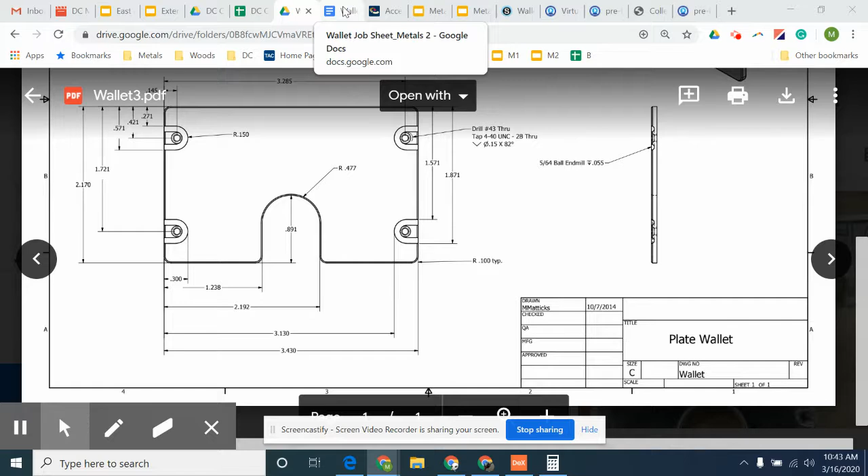So in this video, I want to show you how to create these O-ring grooves. If we go back to our job sheet, it essentially gives us a hint. We only need to draw the outer larger edge of the groove because the tool will create the inner edge when we actually cut it.

We can also just draw one or two of these grooves and then use the mirror tool to copy and make the other ones. So I'm going to show you a couple of different options.

If I come back to my print, what I first want to determine is I'm going to draw this rectangle. If I look, I'm only doing this outer edge right here, not the inner edge for now. So I'm looking at this rectangle, and again I need an anchor point. I'm going to choose this top left corner as my anchor point because I have those coordinates.

My X is going to be 0 since it's on the left edge. My Y, if I look down, is this 271 thousandths right here because that's how far down it is from the Y0.

It's going to be a negative value again. So I'm going to create a rectangle, and I need to know the size, so we have to figure that out. I look down here, and I see one of those dimensions is given to me, this 0.3. So it's going to be 0.3 in X.

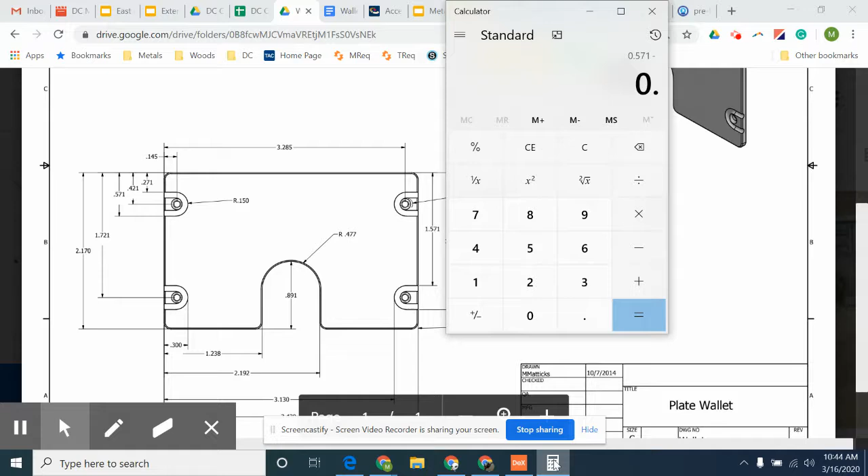As far as Y goes, I'm going to need to do a little math, just like I had to do for the thumb slot. I see it starts at 271 thousandths and ends at 571 thousandths. So if I do a little math and take 0.571 minus 0.271, I end up with 0.3.

So really it's actually a square, 0.3 by 0.3. I'm going to end up making it, at this anchor point, negative 271 and 0.

So I come back to Ericom, and I'm going to create a rectangle. My anchor point is going to be top left. X is going to be 0. Y is going to be negative 0.271. X and Y are both going to be 0.3. And then I'm going to create.

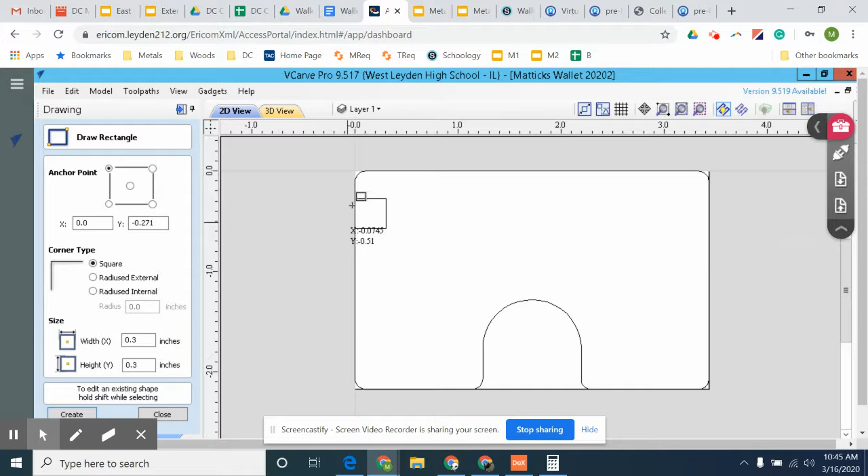It snaps right there. Okay, now I'm going to go ahead and just create the next one by using the print. So now my next one, the only thing that's going to change is my anchor point.

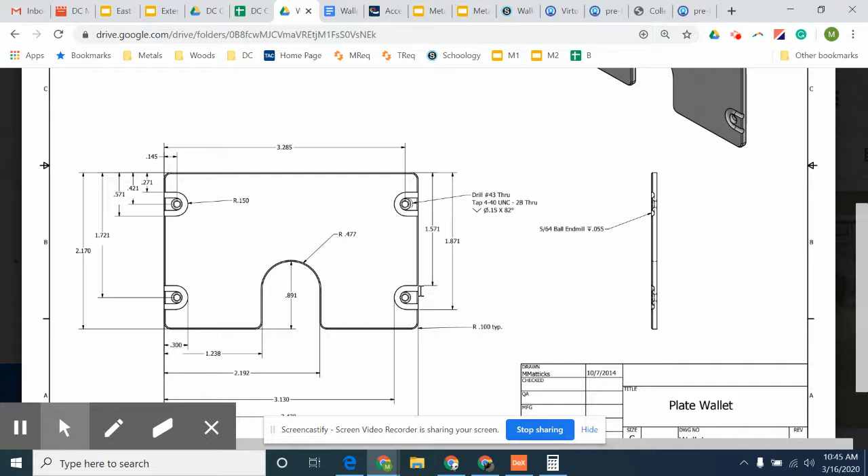I'm going to keep the top left corner, but instead I have to find out what this point is right here. It's not given on this O-ring groove, but if I move over here, I can see that it's negative 1.571. So if I come back, the only thing I'm going to change is this Y value, negative 1.571. Now I have two of them.

Now in the job sheet, it mentions mirroring, so I want to show you that. If I close out of here, I have the two on the left, which is great, but now I can mirror them over to the right.

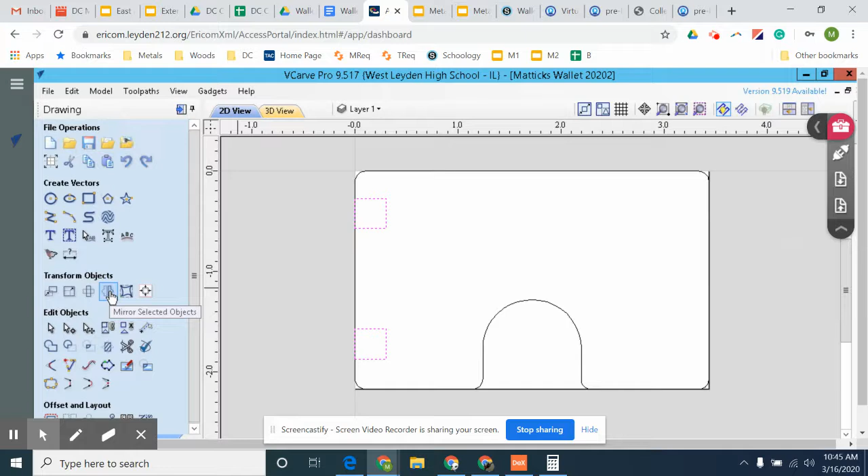If I select them, if I click on one and then hold down the shift button and click on the other one, I can select both at the same time. I come over here to mirror selected objects.

And I have a couple of options. What I essentially want to do is flip it horizontal. I want to flip it around the job center so that it uses the midpoint as its position to flip around, and I want to create a copy.

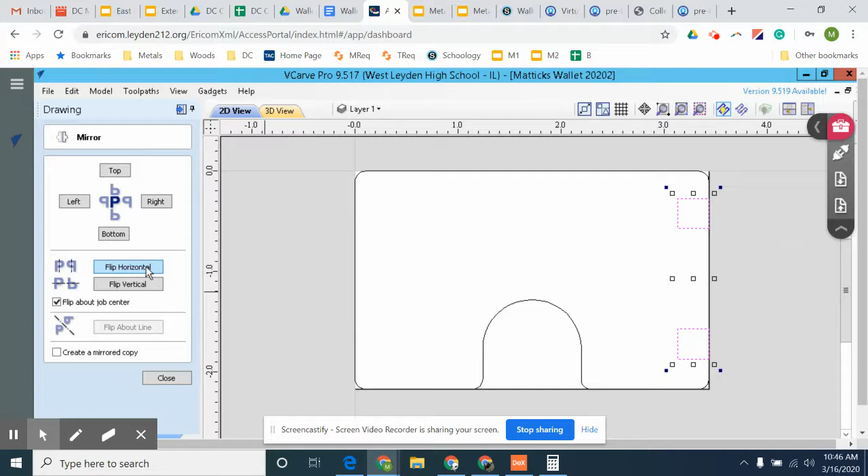If I don't select this, it'll just move the other ones over there. So I'll show you, it just moves them. So I'm going to Control Z to undo, and I'm going to create a mirrored copy and then flip horizontal, and it snaps two over there as well. So it makes the process a little bit faster.

Now I have a 4-sided rectangle here, but what I really want is just 3-sided. So before you go any further, what I like to do is click on the rectangle and just stretch it past by any amount. I don't want to change the location of it, I just want to stretch it past this position. This helps us when we're trimming.

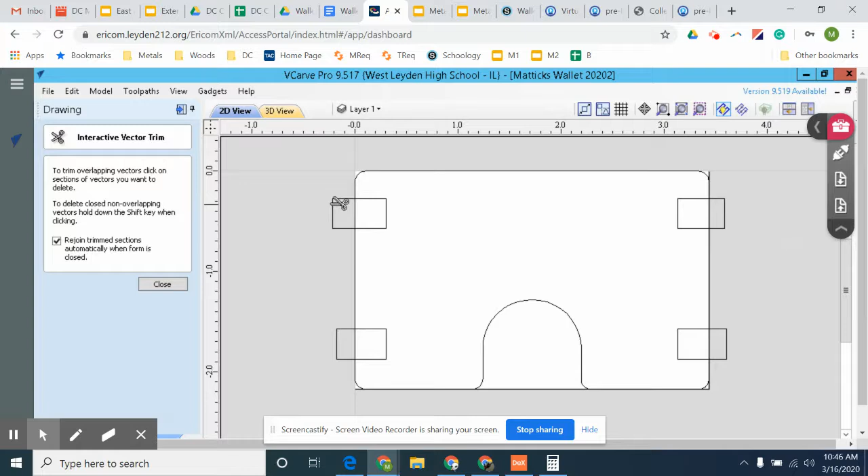So I do that for all 4 of them. Then I come over to my trim function, and what I want is just to trim everything past this line, on the outside of that line. So I just trim there, trim there, trim there, and trim there.

I'm going to escape out and show you what it should look like. If you click on this rectangle, it should just be a 3-sided rectangle, and then it should be independent of the other outline profile, not like we did for the thumb slot where we wanted to join them together. We don't want that for the O-ring grooves.

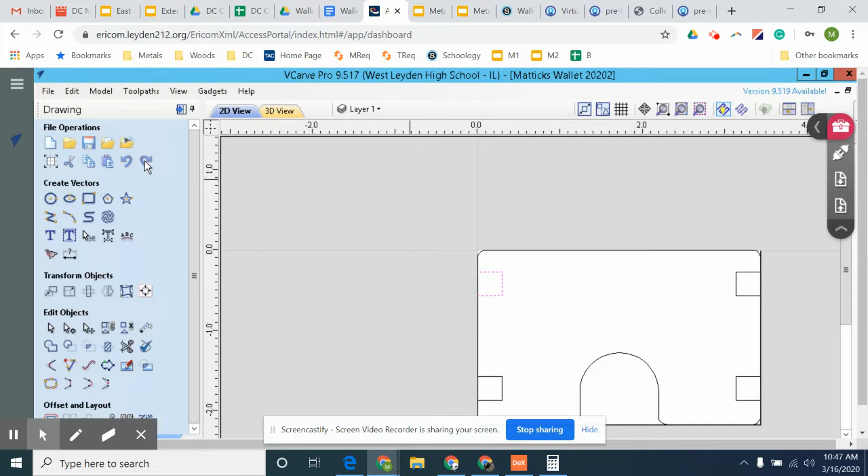So now my last step for the actual groove, as far as drawing it goes, is to just go ahead and do the fillet. I'm going to come back to my print. My fillet for these is 0.150. So if I do a fillet, I set my radius to 0.150. I'm going to go around and fillet essentially 8 locations, 2 for each O-ring groove.

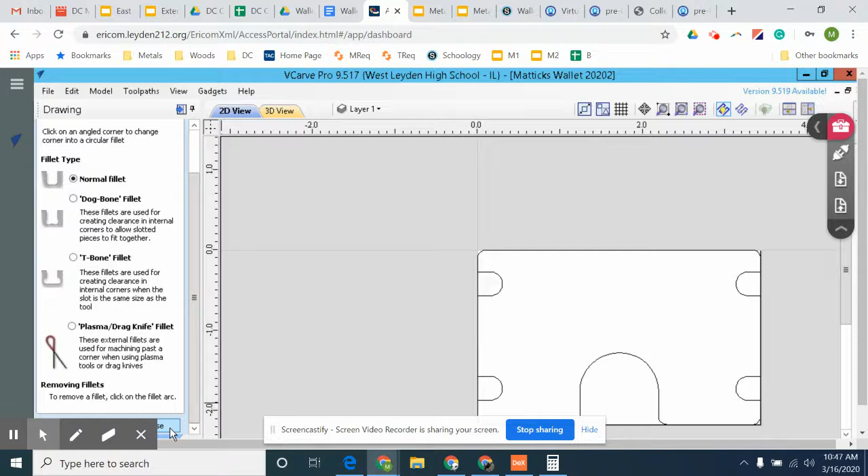Starting to look like the wallet now. The last thing I need to do is create the holes for the actual screws to go in. So I'm going to close out of this. Now for a hole, I'm going to create circles, but I need to figure out where those are supposed to be.

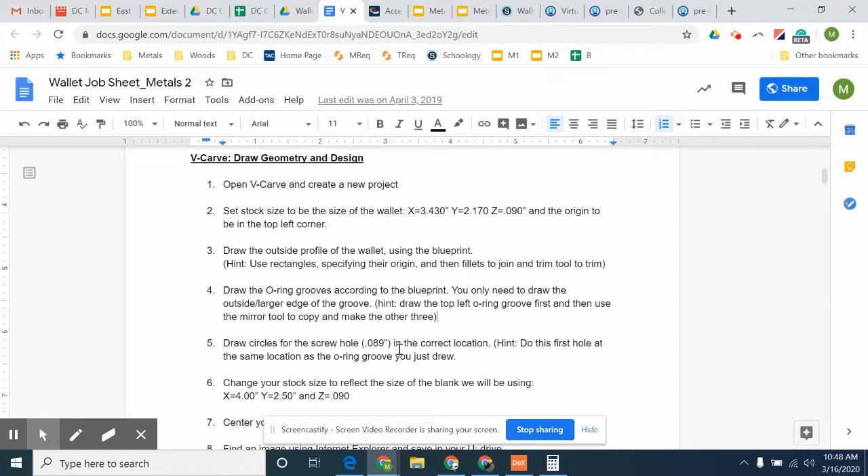I'm going to come back over here. It says draw the holes for the circles at 89 thousandths of an inch in the correct location, and I can do the mirroring again. So I'm going to come back to my print. My hole, my first one, is going to be 89 thousandths, as my print said. That's the tap drill size. Number 43 is 89 thousandths.

Then I'm going to say my location for the first one is negative 421 in Y and 145 thousandths in X. That's the location right there. So I'm going to come back over here, click circle. X is 0.145, Y is negative 0.421. Then make sure you're in diameter, and it's going to be 89 thousandths. And I create, so it creates a circle right there.

I'm going to create my second one down here. The only thing that's going to change, the X is still the same, the size is still the same, the Y just changes to negative 1.721. So I create another one at negative 1.721 and create that.

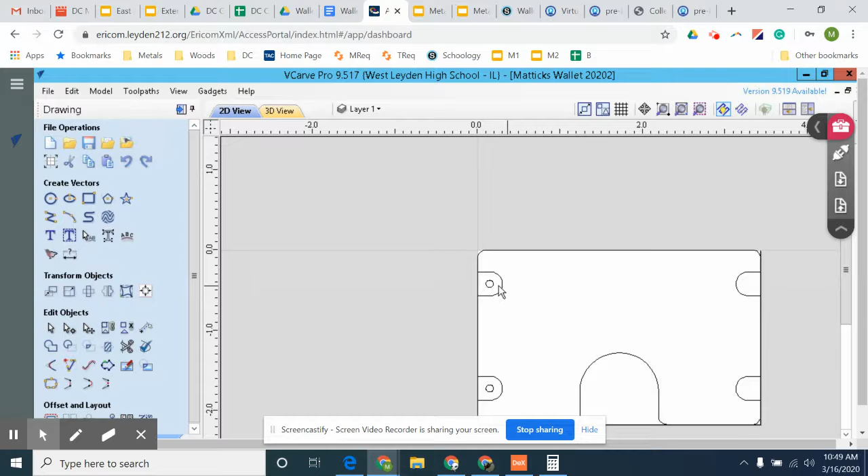Now I can close out of there, do the same mirroring, hold down Shift, select both of those, and then I'm going to go to the mirror, make sure it's going to flip and create a mirrored copy, and it snaps over, and those are done.

So now you can see this is really starting to look like the wallet that it's supposed to. So it has this overall shape. You can see where it's going to cut those O-ring grooves over here, and it's also going to drill the holes. So I'm going to end this video and move on to bringing in some sort of image.